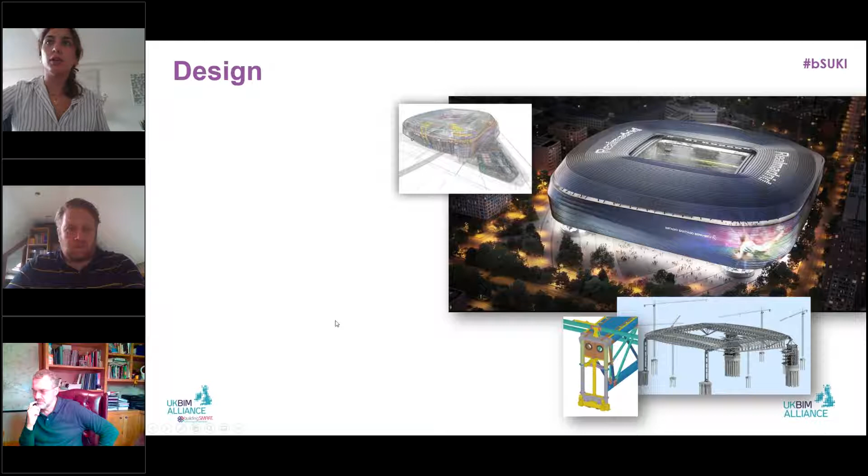This is the Santiago Bernabeu stadium, and I'm not sure why the text isn't coming up. It's a bit weird. Right, okay.

So this is an existing stadium in Madrid for the famous Real Madrid club, and it's undergoing a major transformation, which is part of a renovation project. The main objective here is to ensure that the arena continues to be a global benchmark within the worlds of sports and architecture. So it's a refurbishment project that includes a new facade with a retractable roof, 360 video scoreboard, and mainly an expansion of the stadium to the wider urban setting in which it sits.

Obviously here, the open BIM technology and the collaborative approach is an obvious asset to the project, which I'm going to cover in just a second. So I just wanted to say that this is one of the best practice examples of open BIM, and it's a great project that demonstrates the use of open BIM to facilitate and optimize information exchange. So it's a good example in application of technology in practice. And I'm going to stress on the information exchange bit.

So just to give you a bit of an overview, that renovation work will really strategically place the project as a state-of-the-art arena that satisfies the demand of the club members while also increasing the club's revenue streams. It's a mixed-use project as well, as it is a stadium. You can see here in the project information summary that more than 50 companies were working in design and build, and of the many features, the objective was also to have that refurbishment, placing the arena as a global benchmark.

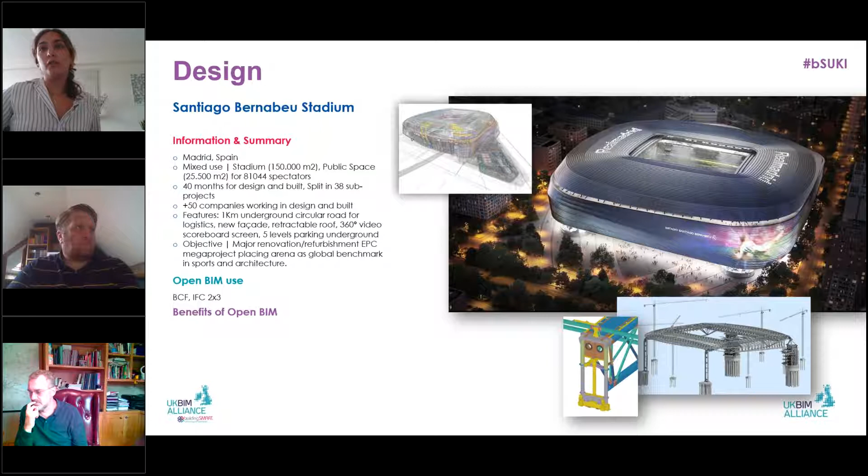Mainly the use of open BIM here was to demonstrate and achieve interoperability, the ability to exchange information between different platforms, collaboration as well. So the use of standardized procedures and norms that facilitate the exchange of information, as well as reliability and flexibility, really looking at the quality processes that guarantee a correct exchange of information.

Talking about the BCF schema, this really allowed proper coordination between all the companies, achieved through BIM Collab, the main platform that allowed them to cover the project complexity. The main challenge of the project was also the complex fragmentation of the model's issues, as well as assigning responsibilities to certain parts of the team and notifying those involved in the resolution of an issue, or reassigning responsibility. Thanks to BIM Collab, they were able to coordinate and conduct clash detections as well, as a main process, which was also a key to the success of the development of the renovation project.

So really all that facilitated traceability and communication between the disciplines. And to take that a bit further, they would have liked to implement that as a digital twin, but obviously this was not really covered in that specific project. But I think the main motivation was to take the standards and the application of technology to be able to further implement that as a digital twin. So as such, the project not only acts as a landmark for Madrid, but also as a digital example for better coordination.

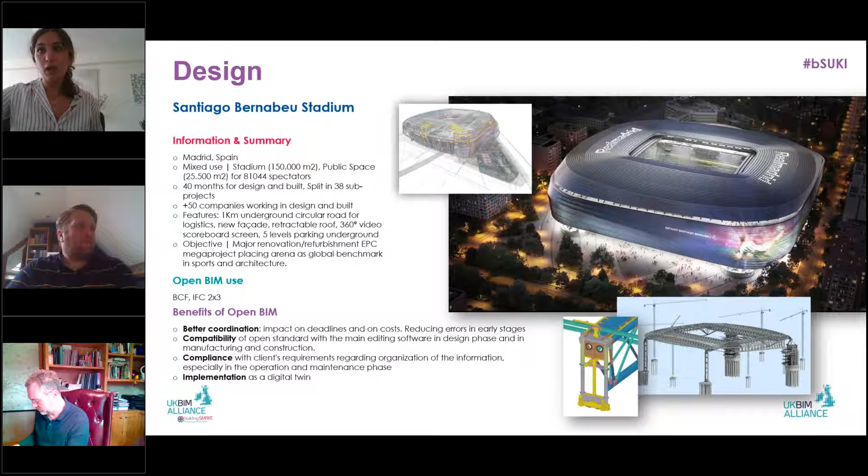I think we can move on to the second project. And this is the IFC rail project.

It's a project in Basel, Switzerland. It's obviously a civil and rail infrastructure project. The main open BIM use was IFC 2x3, IFC4, BCF, and mvdXML. This is a relatively small, low-budget project, but part of a renewal network, which has a construction budget as much as 500 million Swiss francs per year, so that's approximately 400 million pounds per year. So it has a giant leap for BIM in railways.

Obviously the way BIM operates for rail projects is slightly different than construction projects. Here, the main objectives were to implement BIM to improve communication among stakeholders and increase the quality of design, really using BIM for faster and more accurate determination of quantities during the planning phase. As such, they were able to enable a paper-free construction site and feed the execution information back into the model. I want to stress the 4D and 5D planning process to automatically generate mass extracts to directly store cost parameters for cost estimation. They also used some modeling, like object libraries, in order to save time and costs.

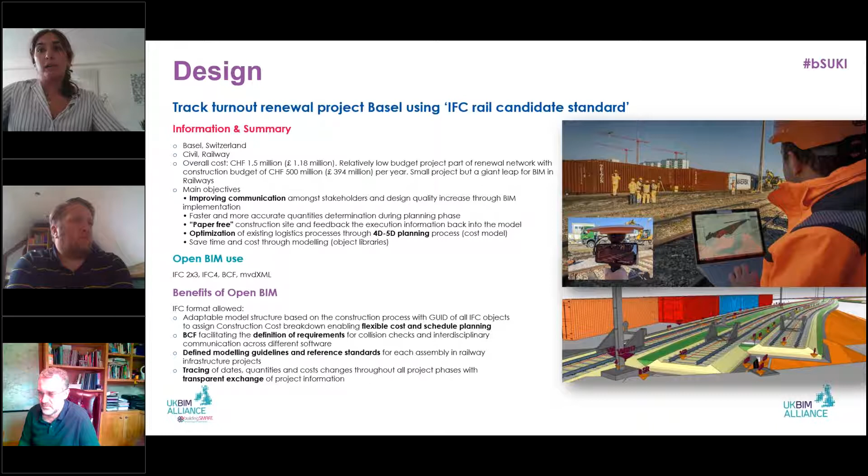I think I can move on to the third project.

And this is an industrial project that happened in Singapore, Woodlands Regional Centre in North Coast. So this is a great example of a project where data is centralized and streamlined with an OpenBIM compliant common data environment, CDE. And the technical work was very well articulated. I think it was a brilliant example on the democratization of data across the construction supply chain and amongst stakeholders.

I don't think it was so much of an innovative or creative input, but rather really an example for a common use of BIM to follow in the industry, since they very well articulated how to deliver OpenBIM as best practice to outperform clients' vision and objectives. So I'm just going to talk a bit more about that project.

Basically, the objective is to have two new buildings, providing a total floor area of over 88,000 square meters for the next generation of manufacturing industries. And it's one of the first few industrial buildings in that area that would meet the Green Mark Platinum certification, which is a sustainability rating achievable.

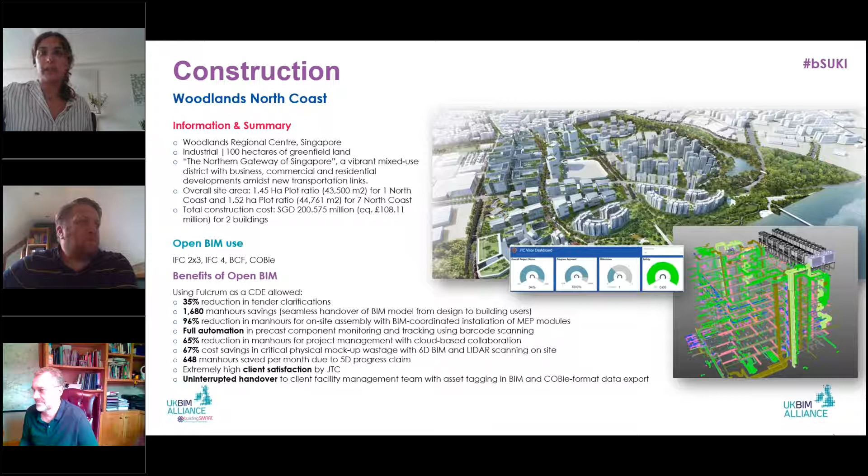I think in terms of the strategic alignment of the overall project, they wanted to give the client a clearer understanding of their building and spaces, also improving accuracy and efficiency of the construction drawing production, and also improving on-site productivity and coordination. And all of that to leverage the relationship between BIM and asset management. I think I will conclude this here and leave the floor open to Lawrence. And if there are any questions, we can answer them, I think, in a bit.

Can you click through the slides, please? Can you click on the next slide, Mia? Thanks. Yeah, okay, so

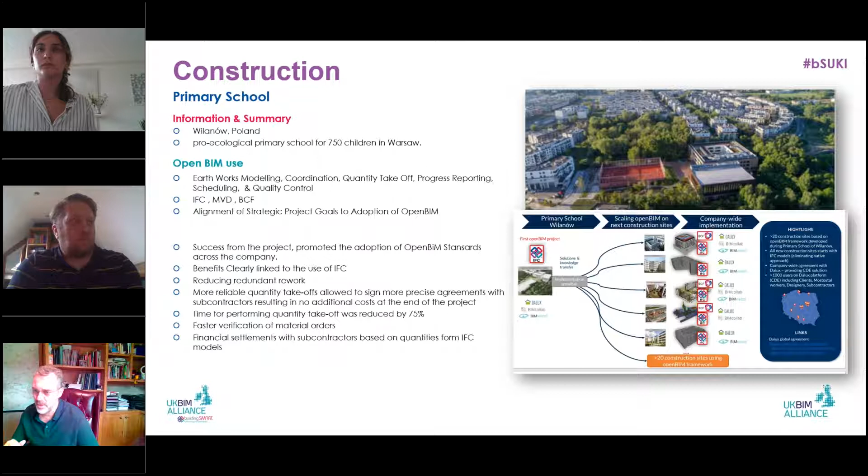I really love this project at the moment. This is a school, a 3-building primary school in Poland. Obviously, here in the UK, we had a very successful Building Schools for the Future programme, but I think for me this took things, through open BIM standards, to the new level. It really did highlight the importance of multiple different project partners all working on a similar platform, a common vision around using IFC and exchanging information.

It was not just for the main structure, but the complete earthworks modelling, the coordination, all the quantity takeoff was all driven by models. The progress reporting was driven by IFC, and so was the scheduling and quality control. Each different discipline had clearly defined model view definitions. I thought this was great work done up front here. And BCF, or BIM collaboration format, was key to actually driving issues and resolution of issues throughout the project.

So the success of the project to me was the adoption of open BIM standards right the way across the thing. The benefits of the project were clearly linked to the use of IFC. So from the outset, that was a really good submission. There was a massive reduction of rework. As I said before, the quantity takeoffs allowed them to sign more precise agreements with subcontractors. All the quantities or subcontract payments were all driven from the

IFC model, and certainly things like the faster verification of materials. We have a real issue here, especially post-Grenfell, about the verification of materials on sites. This really demonstrates how IFC is a real enabler for that. So that's a big win for me. And so all financial settlements for the subcontractors were also based on quantities from the IFC models.

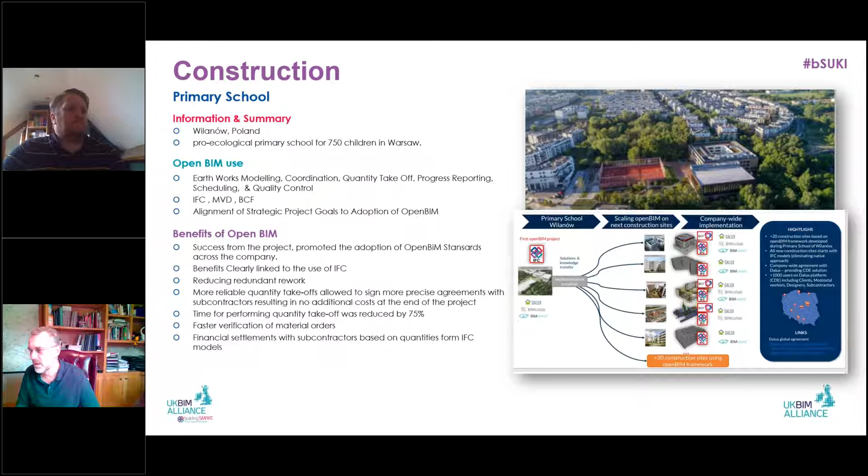This project was a bridge, the Randselva Bridge in Norway, and for me this is a complete game changer in the way that digital construction can really be changed from the traditional forms of design and construction. This is a 634-metre bridge, but there wasn't a single drawing used in either design or construction. The whole design and construction was based on three-dimensional models.

Everyone on site was given a tablet to navigate the models, record any non-conformances, raise any RFIs. It was done purely digitally from top to bottom. So 95% of information transferred was done through IFC. There were over 250,000 IFC structures object models.

The complete rebar schedule was all driven through IFC models, and even each of the rebar elements were taken off from the model and put straight into the rebar bending machine. So everything was cut and modeled directly from the IFC model. Effectively BCF files were used by the third-party control, multidisciplinary controls. So right the way through, top to bottom of the project, everyone was using IFC.

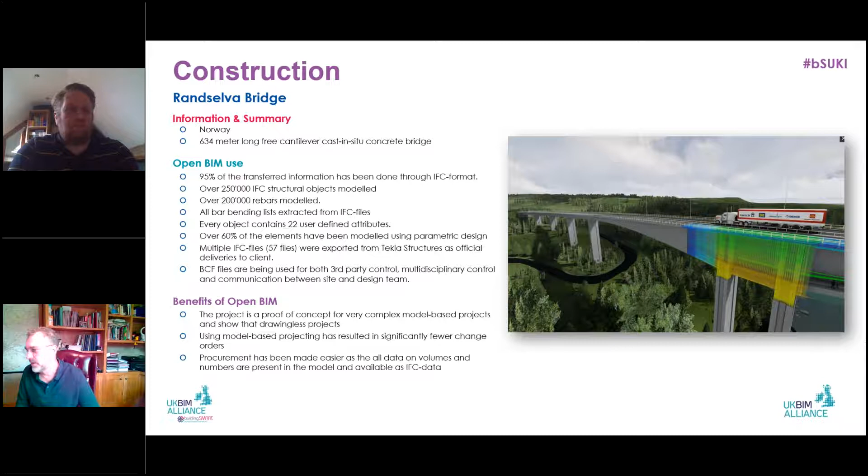This is a massive project. This is a high-speed rail line from Beijing to Zhangjiakou. This is where the Winter Olympics in Beijing is going to be held. So this is one of the first 350 km/h high-speed rail lines that's going to be built in a highly cold, windy environment. Even just the technical obstacles of building anything in this colder environment are tremendous, let alone having to run a high-speed train with all the stresses and strains on it as well.

So this project really shone out because I'm currently working on the HS2 project, and this to me takes the development of IFC and Open BIM to the next level, and it's a real driver for me and the HS2 team of how we can achieve the same level of expertise that was driven on this project. Interestingly enough, the whole project has been run around the ISO 19650 standard, which I thought was a great adoption of how the international community are developing and adopting the standards.

So there was actually a huge amount of data that was created and transferred. In the development of some of the IFC standards, the China Rail Construction Consortium have really added to the IFC rail domain. So where elements haven't been done, they've actually enhanced the IFC rail schema off the back of their own needs. So again, greater sharing and collaboration across the world on this.

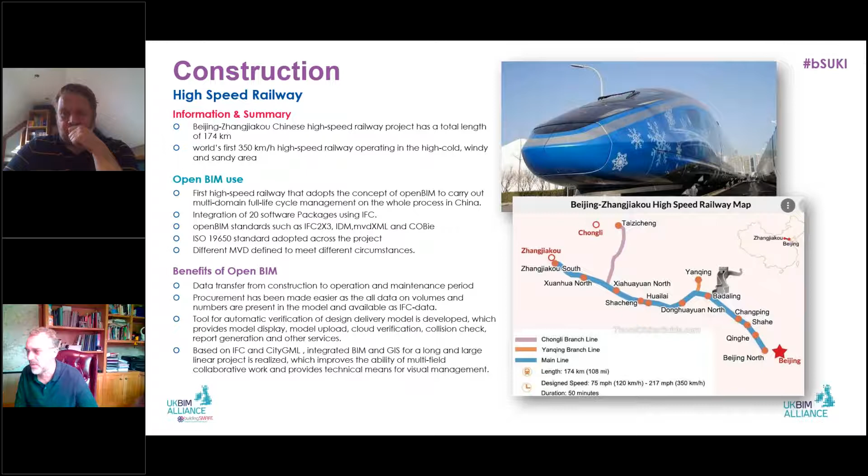Thanks, Lawrence. Just before I go on, you did incredibly well there. I don't think I could have followed on from Mia, who did a sterling job of presenting on those awards. Thanks, Emma. If you move us on a slide.

I think hopefully what you'll see from all of our little snippets of these awards is that extensive capabilities in digital design, construction and engineering are going into a vast array of projects across the globe. We can only share with you a fraction of what we've seen. Each submission is over 5,000 words, a series of presentations, videos, even copies of the models in IFC. We've had to review all of that and try and give you a derivative. So please, if you do want to know more, get in touch with us.

Some of my favourite awards: as you'd expect, I'm a highways engineer, so I had to pick out one of those. This is from a fantastic client in Norway, the Norwegian Road Authority, or their derivative, building hundreds of kilometres of motorway, Nye Veier.

This is their E6 Kvål to Melhus, only 7 kilometres, 76 million pounds, number of structures and culverts and environmental features as you'd expect, but driven by the client, who came over to the UK a number of years ago to look at the way in which we were approaching BIM, using IFC for exchange, using BCF to communicate about clashes and RFIs, using LandXML for terrain so that it enables machine control, using CoClass from Sweden as their classification.

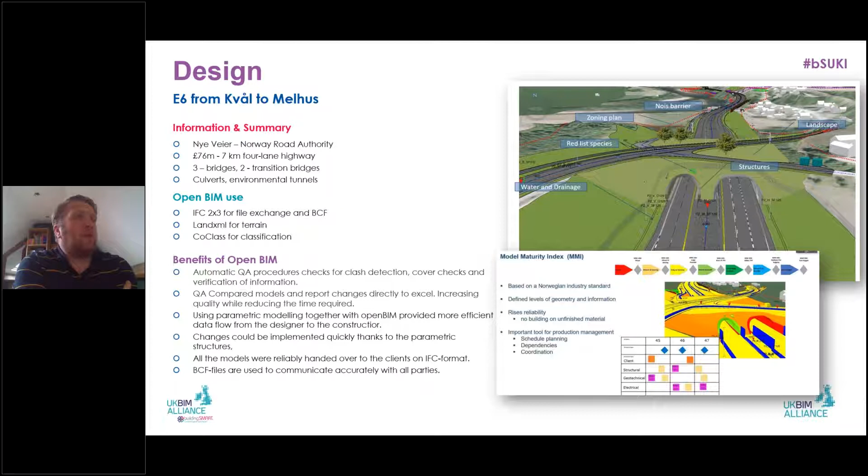Again, we go from one end of the globe to another, from Norway to Australia, Australia's own Crossrail by the look of it. So down in Brisbane, 10 kilometres of new rail line, with almost 6 of that in twin-bore tunnel. It's not quite as much as Crossrail, about half. Again, a significant investment in new infrastructure going into Australia, and again they've benefited from the use of IFC for file exchange across a significant ecosystem of systems that have delivered this job.

Again, the size and scale of this almost boggles the mind in terms of how many elements are being modeled, yet they can deliver a standardized approach to deliverables, a standardized approach to information capture. Something I'm always striving for is greater transparency with our clients and through the contractors to the progress that we're making. That is all coming through via data, via digital means, and again building in asset information from the outset.

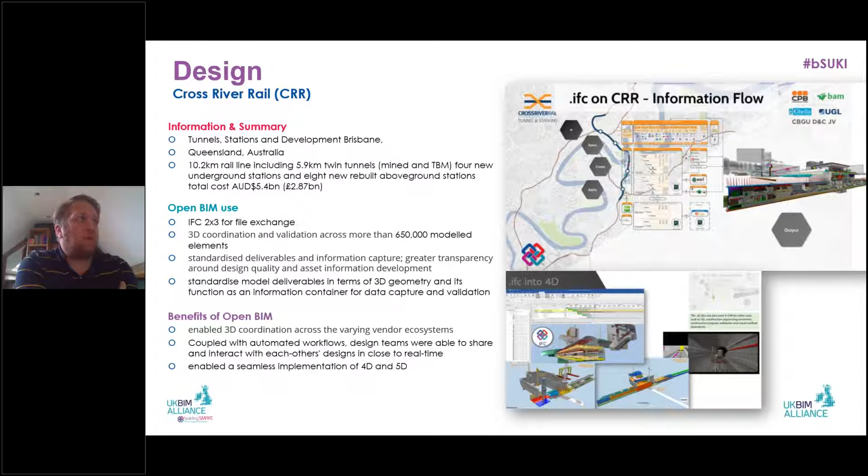Emma, thank you. Go on to the next one.

So the categories that we have for the awards fit into the project lifecycle as you'd expect, from design to construction, into handover, asset management, facilities management, but also some research that Nick will show later on. Again, down in New Zealand, an absolutely huge office and distribution center complex adjacent to the airport. And again, from my memory, the airport operator really is driving the approach to Open BIM throughout. So you have a very informed and knowledgeable client driving the supply chain to use Open BIM for their benefit over the long term in terms of handover, but of course also throughout the rest of the life cycle.

Again, IFC 2x3 and 4 used in this instance, and BCF for the communication between all parties for clashes and RFIs and TQs. OmniClass used as a classification system this time around, the American-based classification, and they benefited again from the client demanding file exchange in IFC. It proved beneficial for the supply chain that they weren't required to move to a single proprietary system. Essentially, they could retain the software of their preference for their production methodologies. They didn't have to address any shortfalls in terms of capability or skills within their teams. In fact, they essentially won the tender by the mere fact that they were able to deliver open, interoperable data rather than through the use of a particular proprietary brand of software.

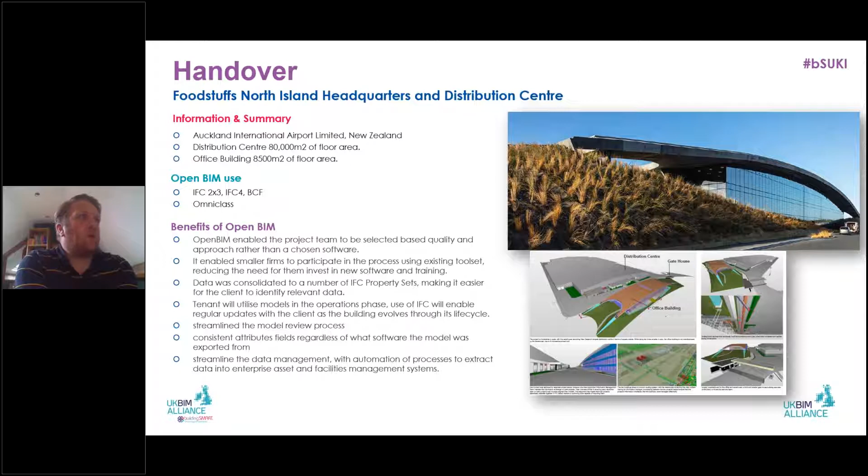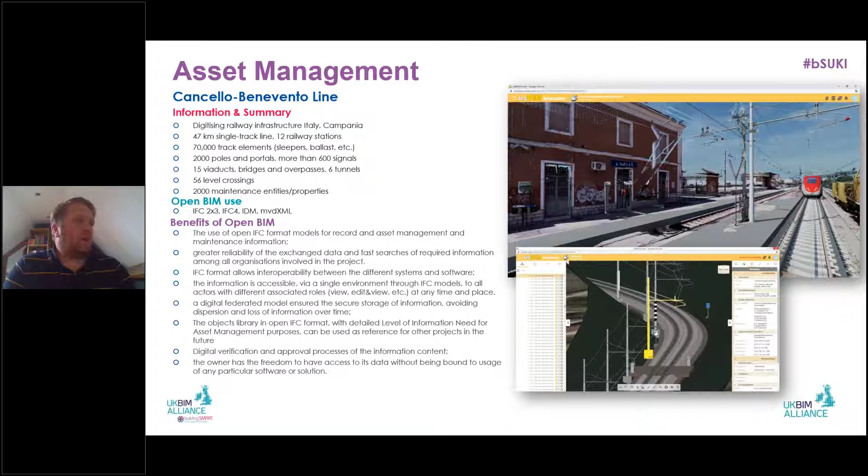Thank you, Emma. I'll go on to the next one, my last one, I think.

Again, the digital twin concept is all the rage at the moment. For me, this one was a fascinating example of how even through facilities management, there is the opportunity to improve the assets that we may already have, to analyze them and understand them better, to use Internet of Things sensor technology within the building, combined with a robust data schema, file format, to give a visualization of actual performance against the baseline, against that which was expected within the design, and then to project where in the building we might be suffering from a performance gap.

So Siemens were the lead organization here. I think it's one of their office establishments in Switzerland. Essentially captured the design in IFC, verified that through surveys of the building, and then combined the use of the sensors within the building and the IFC schema to collate and bring all of that data together to give a visualization on the performance, but also a breakdown of the structure using IfcSpace and the logical breakdown of a structure that we have in IFC.

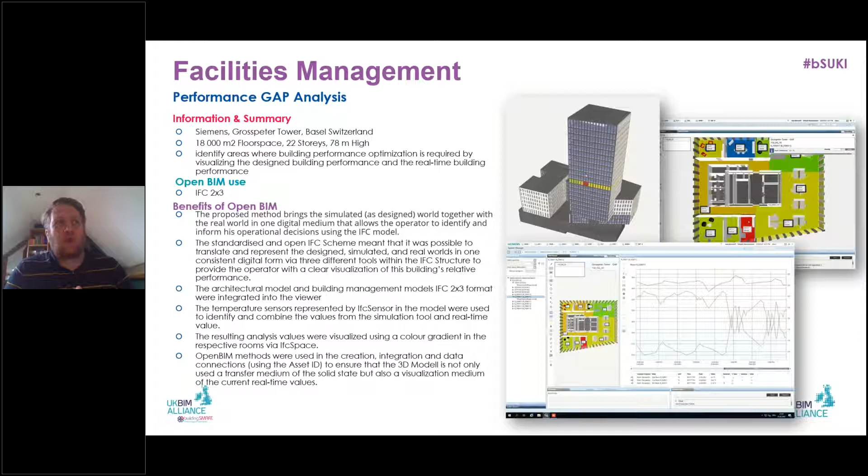These guys credited IFC with being the glue that brought this all together. All the existing technologies were there, but it really was the common data schema that IFC provides which brought that all together. Emma, I think I'm done.

Yes. Nick, over to you. Yep.

Okay. I've got a slightly harder task than the previous speakers because there are two research categories, professional research and student research. And I'll say a little bit about three professional research items and two student things, but please don't expect the graphics to be as dramatic as some of the buildings and infrastructure projects that we've just been looking at. So next.

The first one is a project about the automatic generation of MVDs, in other words, model view definitions, requirements definitions, by linking IDM and bSDD. Immediately, we're in acronym soup here. But the interesting thing was that they introduced the research with this project control room and illustrated it with the idea that we need to monitor our projects and understand and control the quality of the information that's flowing into them, and that just as much as the monitoring of the site, we need to monitor the information.

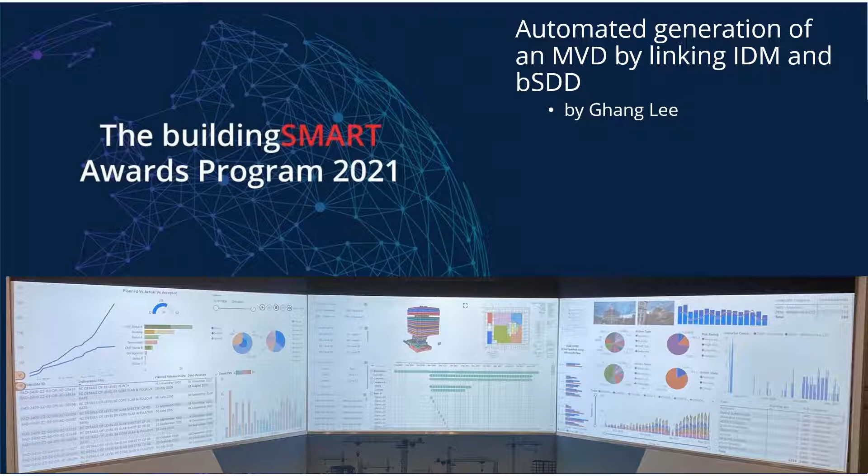In detail, on the next slide, the process is about joining existing buildingSMART standards together. The IDM is about reviewing and examining and understanding the processes in our industry. The existing standard is part 1, and there's a part 3 for its electronic or interoperable representation.

Then calling on the buildingSMART data dictionary, which of course follows an ISO standard, as the resource that makes sense of the concepts that have turned up in the IDM and can connect them to choosing the IFC elements that are relevant, and then automatically generating the rule sets which will actually allow that testing to take place.

So no pretty pictures. A very simple aim is to start using the standards together. And I think that's probably what really caught my eye, was that the links that we always believed would appear, people are now starting to exploit them, and so on.

Okay, the next project was a little bit more visual. BIM-based structural health monitoring for historic timber buildings. And what this was looking at is the historic temple structures in China, and making sure that the sensing network could be used to update an IFC model of the structure, and then making sure that that IFC model could be visualized so that the building could be monitored for movement, either gradual movement or earthquake damage, and so on.

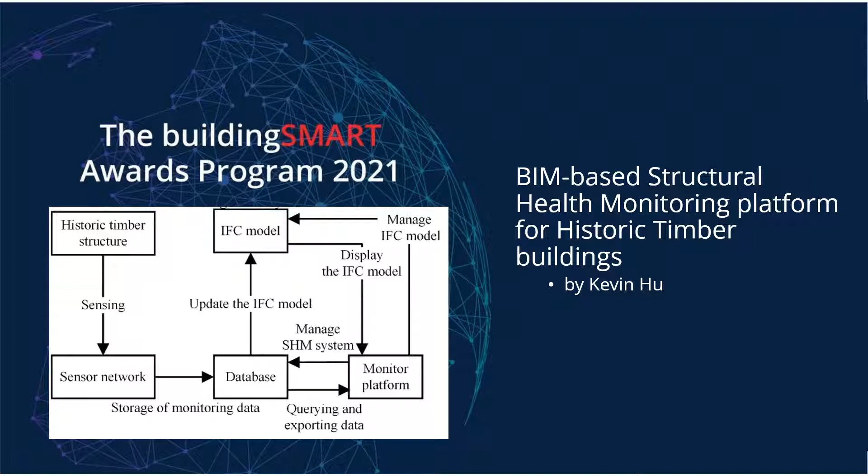And so it's an investigation into some of the basics of the digital twin idea, but done particularly well and quite graphically. So on the next slide, you can see on the right screenshots of all the different things they were doing. You can see there's an IFC viewer involved with a lot of annotation. You can see at the bottom that the sensors are monitoring the movement of the structure continuously, and you can see around it that there are all sorts of property and activity displays, all derived from the system.

Of course, on the left-hand side, you can see a diagram that shows how they joined it all together. And you can see the importance of the GUIDs to link the real sensors, each of which has to be identified as to where it is, with the equivalent IfcSensor in the model, against which you could store the parameters and the differences that were being detected. And of course, the main purpose was to look for alert events that needed a real reaction.

So I think this combination is the start of, and you know, it's another aspect of the digital twin, but actually saying that you can't monitor things unless you've got some sense of an IFC model to compare it against and to give it meaning. A problem that I found when working on hospitals in the UK, that there was no sense of place or in the differences between the different sensors.

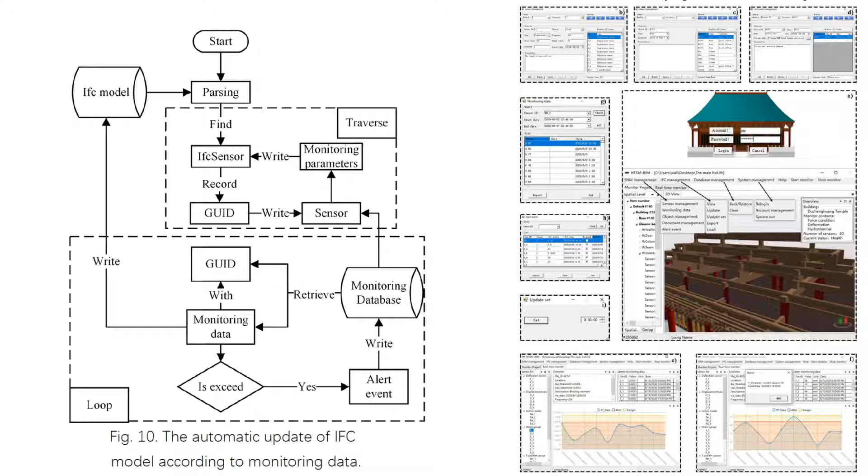Okay, the next submission is really joining BIM with blockchain. And I think that's a topic that's come up various times, that blockchain offers guaranteed secure versioning. And so this came from Hong Kong University, but they were responding to a real problem, and it was a problem caused by COVID-19, which makes it particularly topical. That buildings were being designed and constructed in Hong Kong, but the manufacturing of the parts was happening in mainland China. And with COVID-19, the traditional inspections were no longer possible.

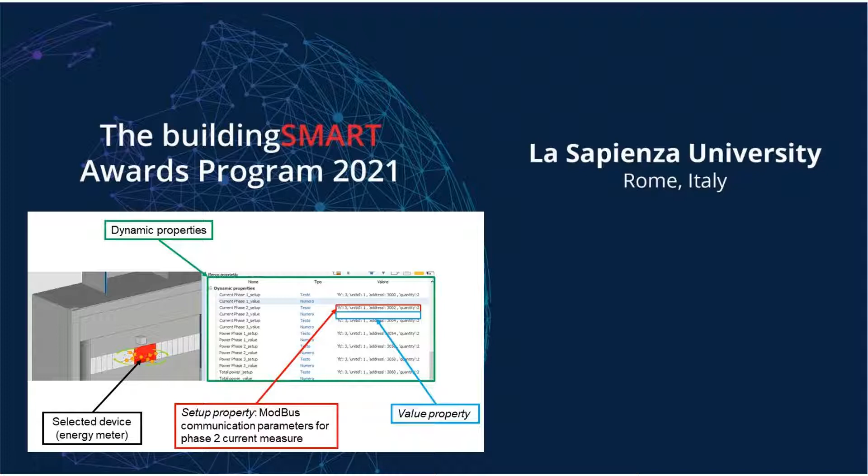So on the left, you can see a representation of an energy meter. On the right, you can see a report from the monitoring BMS system for that building, of the state of the different circuits. And on the next slide, you can see a still from one of the movies they produced, which I wish I could show you. Essentially, you could see people altering the switches in real life, and the BIM model was automatically updated and the state of the switch is shown. Equally, you could click on the BIM model and change the state of various switching circuits as well.

So it demonstrated that two-way link, with a very plausible user interface, which I think builds upon the strength of the Italian IFC implementations, which we've seen at many of the awards and presentations over the last few years. So yeah, I think the other thing that struck me was that the student had made a movie to really convey what they'd achieved, and I thought that was above and beyond what you would expect from a research submission.

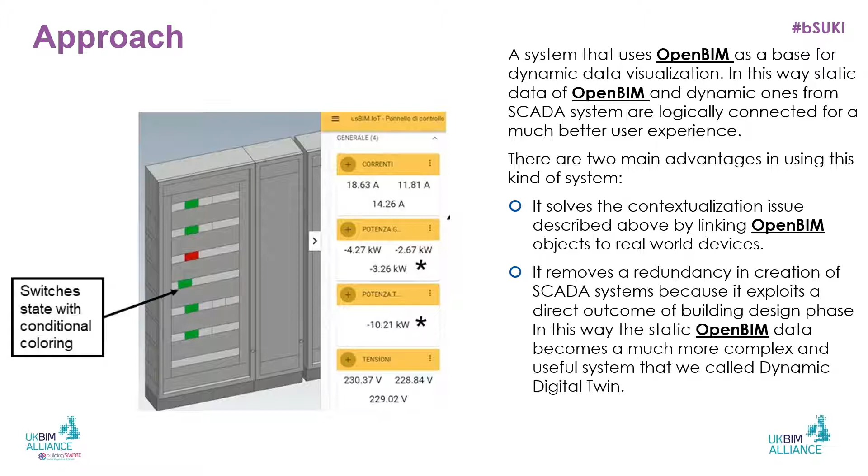Okay, and then my last item, the IFC Infra Toolkit. Again, this is one which is a bit abstract. The Technical University of Munich has been heavily involved in the development of IFC 4.3, and in particular the road and rail extensions. So this student has been working on tools, including Dynamo interfaces, to connect the new modeling tools with the new schema, to generate the test cases that have been used in the last year to validate the 4.3 package.

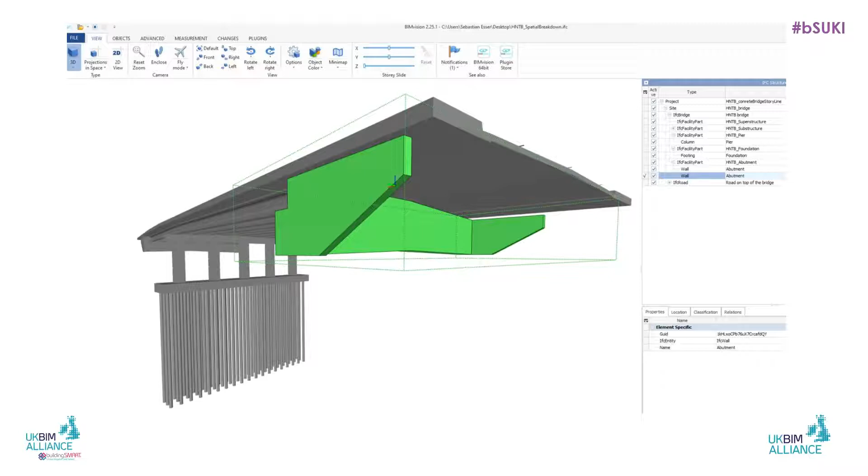And the other process is that all the candidates for the awards—not all the candidates, the finalists—will be turned into use cases and published over the next few months. And indeed, if you go to the buildingSMART website, you can see case studies from last year's winners.

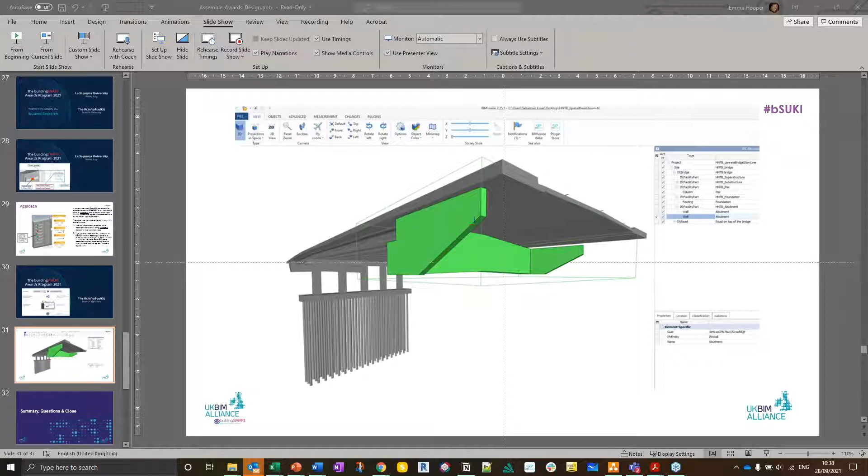For the first time this year, we have asked the finalists to submit BCF files or IFC files as evidence. We are not publishing them—that would have created all sorts of commercial issues for the live design, construction, and handover projects. They're submitted for the judges' scrutiny, and increasingly we will be turning to the actual files rather than the material that people present, or giving equal ranking to those. But the judges are very sensitive to the quality of the submissions, and substantial numbers of award submissions are weeded out.

And so I hope you found these interesting. Okay, what's happened?

Okay, thanks, over to Nick. Sorry, yeah, over to Marek now. Hello, hopefully. Please, can you confirm if you can see my presentation, Emma? Yes, we can see it. Okay, thank you. Yeah, apologies for mine not being in the deck—I had a reason for being a bit late today.

So I'll be on the last and hopefully not least summary of award categories, in this case technology. There were 18 entries, which was quite a substantial number to go through, because for those who aren't familiar, it takes a good half an hour to actually go through each entry, because we do need to scrutinize them and go through all the details they've submitted.

Great to see an international mix of entrants, including some from the UK and Ireland chapter. There were quite a few proof of concept entries, so not everything was necessarily being used in anger on the project, but really trying out an illustration of an IFC-based workflow.

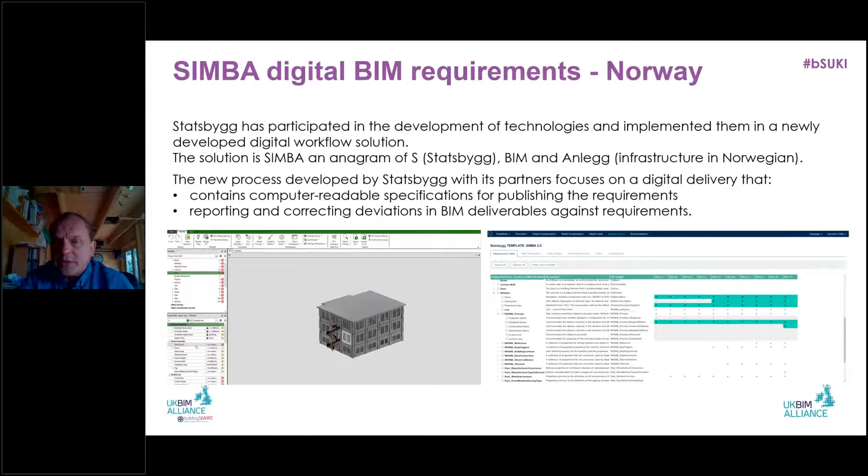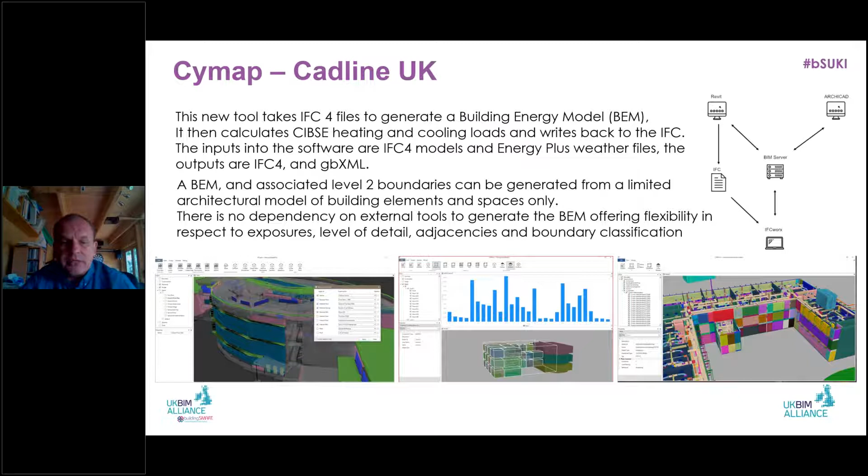This next one I picked specifically because it's a UK example from Cadline, now called Symmetry, and they've developed something quite interesting - a tool for building energy modeling. It can consume IFC4 files from whichever modeling package you prefer, generate IFC4, process that into a BEM, apply CIBSE heating and cooling loads, and write back those loads into the attributes of the IFC. This is a really good illustration of how IFC can be used in an important workflow, and it's available now as a solution. If you're interested, go to Cadline's website and look up Cymap - to me this was one of the most interesting examples of something near market ready. I think it's still a slight work in progress, and they're enhancing it.

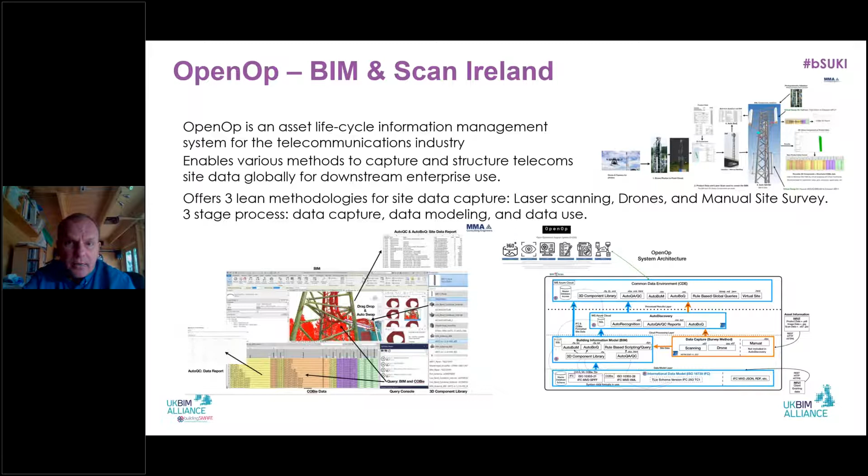Another one I've included is a UK and Ireland submission from Sean O'Keefe, who I believe has presented at previous UK and Ireland buildingSMART sessions, and was also a shortlisted candidate last year. This tool called OpenOp is really a workflow to capture telecommunications assets using a number of survey methods, including laser scans, drones, and manual surveying, then model it and apply that data in use - illustrating where existing assets probably don't have good data, and how we can speed up the process. This OpenOp philosophy shows that we can generate good models of existing assets and, in this case, capture them in an IFC format and create COBie files to manage extended attribution.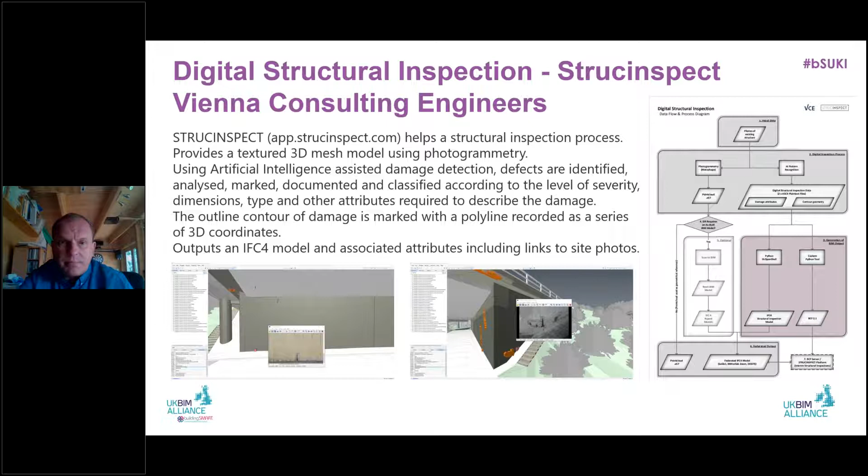There was actually also one other similar bridge inspection, but this one was the one most people realized was best developed. This is from ACCA Software, an Italian software house with a quite wide toolkit of solutions, and I think they're the only vendor I know that can actually read and write natively in IFC, which, you know, full credit to them. They've developed this thing called usBIM.ids that is really very much a proof of concept around the information delivery specification that buildingSMART is developing. This has not been published or finalized, but again, much like the Symba example at the beginning, it's all about requirements definition and then verification that those requirements have been met during the life cycle of the project, and hopefully into the operation of the asset, because they're capturing them against the IDS.

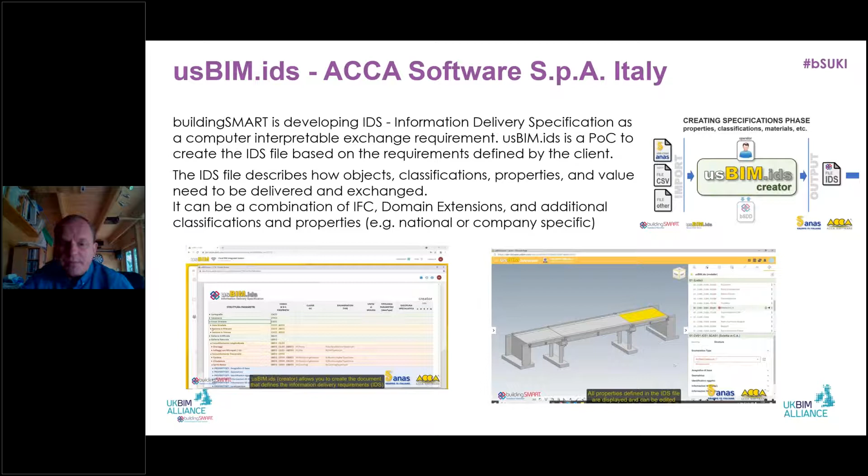So the IDS is the way to generate the requirement spec, and then as the project delivers models in IFC, they can be checked and verified that they are meeting the requirements by phase and discipline.

I will move on to my last example, which I won't hide is absolutely my favorite, because it has the potential for the most significant impact for IFC rollout that I've seen anywhere.

That's the Open Design Alliance, ODA, who have developed their IFC software development kit very robustly. They've been deeply involved in the development of IFC 4.3 for infrastructure, and they've added other tools, such as the ability to convert to formats like DWG for use in downstream software.

Their toolkit has now been adopted by a number of important software vendors, not least my own company, Autodesk. If you are a Revit user, in literally the last couple of days, Revit 2022.1 has been released, and this has transitioned to use the ODA software development kit, allowing a more enhanced and rapid consumption of IFC into Revit, but also export.

We have also got support for beta IFC 4.3 implementation, so those interested in testing IFC 4.3, it's already available in Revit. Revit won't necessarily understand what the elements are because they may be infrastructure elements, but this shows a direction of travel.

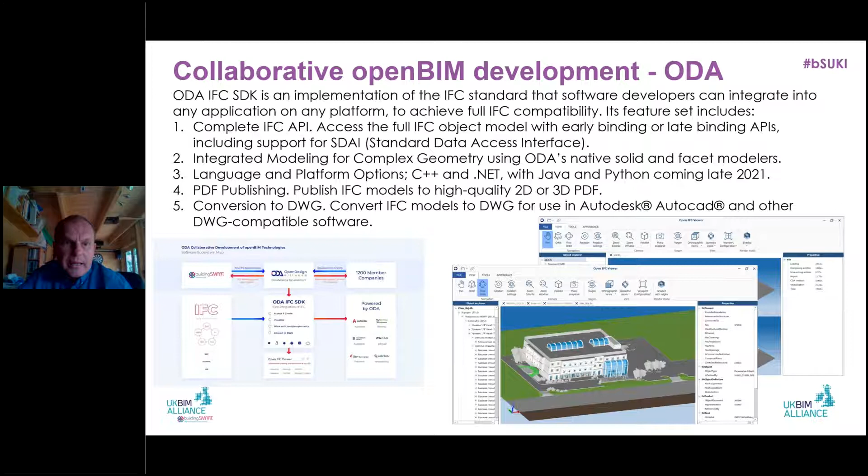I believe Bentley and a couple of other software companies have also moved to using the ODA software development kit, and hopefully you appreciate why I feel very strongly that this is an excellent example of something that could have a long-lasting and deep impact on the rollout of IFC for use in industry, and also credit to ODA. They are investing a lot of effort in developing their toolkit, so it will hopefully be kept up to date, and software vendors using it can just update their library solutions from ODA and really get the best performance and reliability out of IFC in and out.

And that's my final slide. So I now need to work out how to stop presenting. I think, have you taken it off me, Emma? Yes, you have. Okay, thanks, Marek.